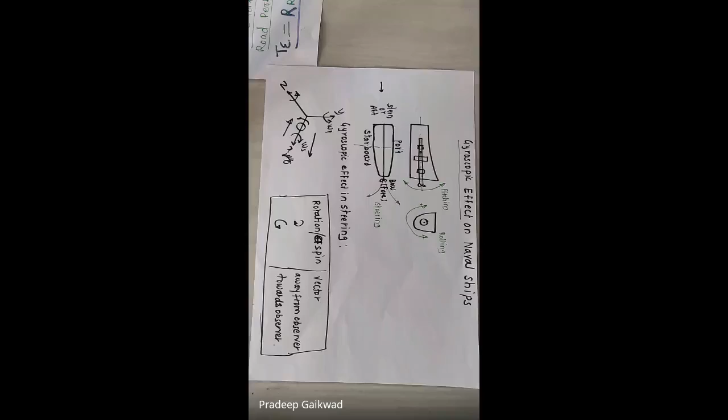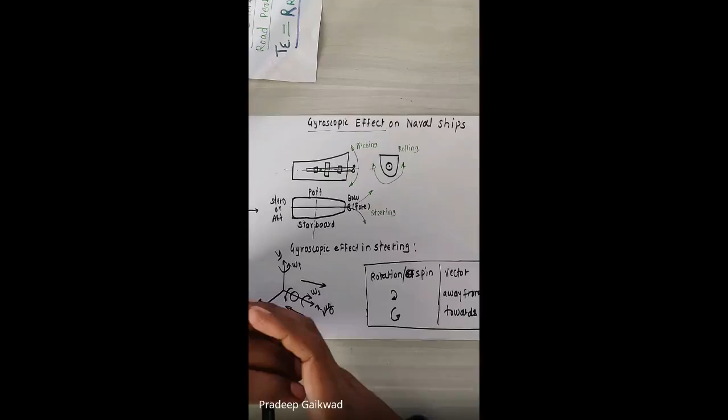I shared with you two videos on YouTube related to the gyroscopic effect in case of naval ships. I hope you understood that. Can anyone summarize that in 2 minutes what we've seen in the two lectures? I'm not going to repeat that topic, I'll just revise it briefly and then go to the next topic, which is four-wheel vehicles.

Am I audible? Hello. Yes, sir. So please, can anyone repeat or review it? Can anyone? Otherwise I will go for the next topic.

Actually, it was an important topic. I don't know how many of you have seen that, I will check it later. But it is expected that you should watch those videos, go through them so that you'll understand the concept of gyroscopic effect in ships. Okay, I will just highlight it since no one is ready.

Excuse me, sir. When we talk about gyroscopic... yes sir, could you please, Vedant, explain the pitching point again? Because at the end it got a bit mixed up.

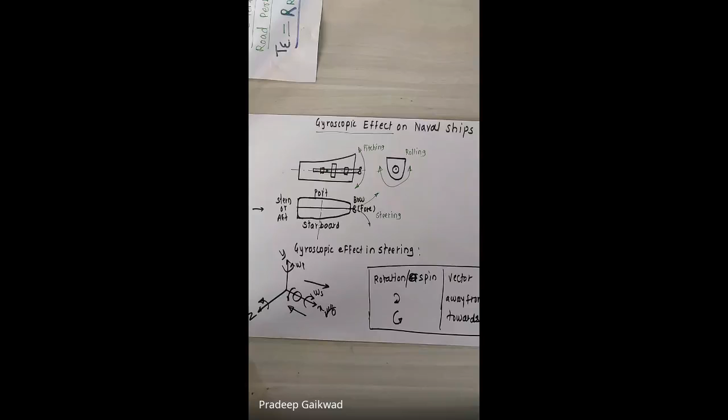Okay, pitching, second case. Yes, can you repeat please what you said? Will you please explain the cases in pitching? Okay, okay, pitching, yes sir, we'll discuss. Sorry, is it possible you can revise the pitching point again because it got confusing in the end? Okay, sure.

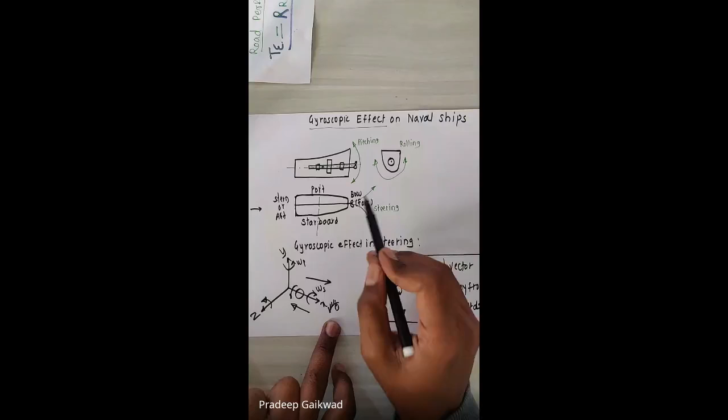I'm going to revise this briefly, so try to concentrate. The rear end is called the stern or aft end. If you observe from the rear end, the right hand side is called starboard and the left hand side is called port.

Now, when we take a right turn or left turn, the motion of the ship - let's say the ship is moving on this straight path and after some time it takes a turn towards the right, meaning it rotates in a clockwise direction, or it takes a left turn. Similar to the aeroplane we discussed, an aeroplane taking a right turn or a left turn - that kind of motion is called steering motion.

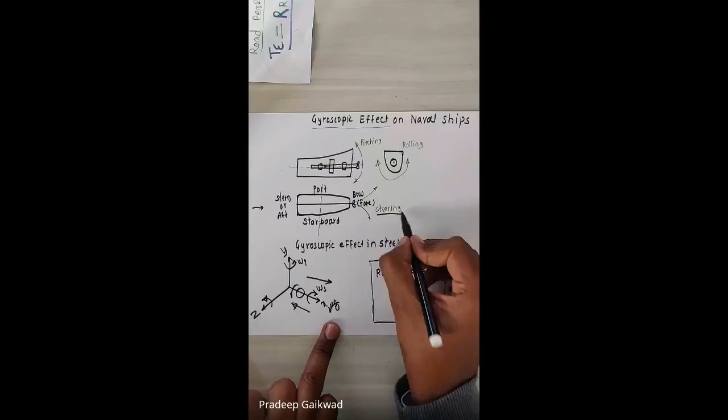When we discuss this ship in the vertical plane, this one is the longitudinal axis. If this longitudinal axis is allowed to move up and down, or whenever there is cyclic up and down motion of this longitudinal axis, we call it pitching.

So what happens during pitching? Let's say this longitudinal axis is at this position. It may move like this - you can see here, in this case, this front end called the bow end moves up. Of course, when the front end moves up, this rear end will move down. The reverse may happen too. So there is cyclic up and down motion in this way - this kind of motion is called pitching.

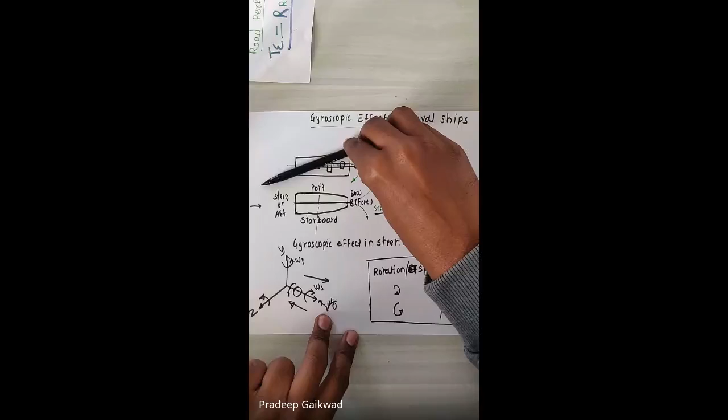Are you getting the difference between steering and pitching? Yes sir. Okay, you can see this - let's assume this is a ship. When I say the ship is taking a right turn or left turn in the horizontal plane, remember this plane is horizontal. In the horizontal plane, either right turn or left turn - this motion is called steering.

But if the ship is moving like this during motion, if this kind of motion occurs - now you can see here, this is the front end, this one is the rear end. When this front end moves up or moves down like this, this cyclic up and down motion about a transverse axis - this is the transverse axis - is called pitching.

And there is one more motion. If you see this, let's assume this is the ship and I am observing from the rear end - so the right hand side is called starboard and the left hand side is called port.

Okay, so either from starboard or port, this one is rear end, this one is front end. What I want to explain is rolling. If the ship is moving like this, starboard moves up, starboard moves down, port moves up like this. So cyclic up and down motion of starboard or port side is called rolling. Rolling is about which axis? This one is longitudinal axis, this one is transverse axis. So about longitudinal axis, this motion is there - cyclic up and down motion about a longitudinal axis is called rolling.

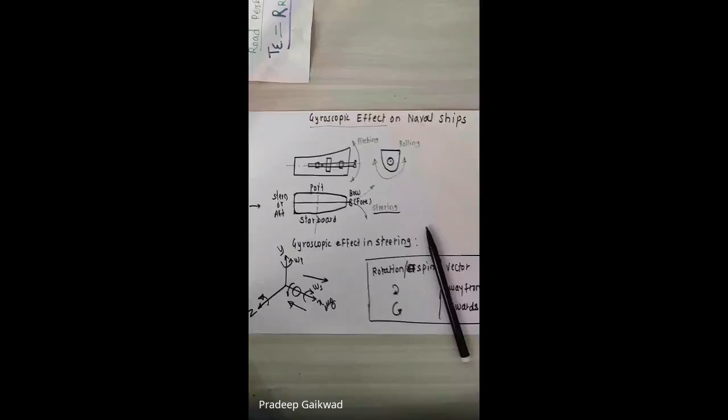So three motions are there in case of ships that we have to discuss. In case of aeroplane, we just discuss when it takes left or right turn, but same motions are applicable for aeroplane also. Generally in syllabus we discuss only that as per syllabus, but in ship we have to discuss all.

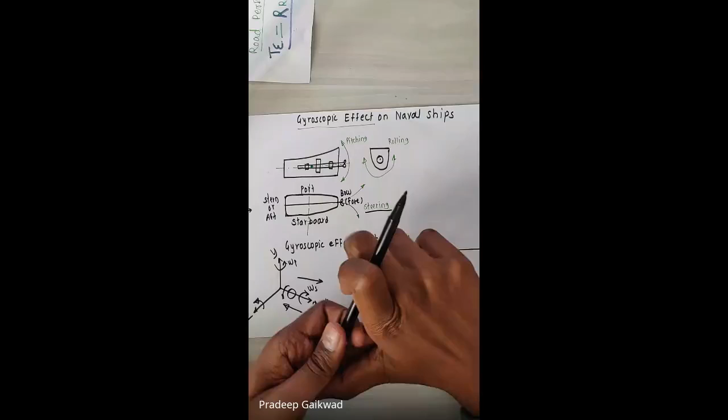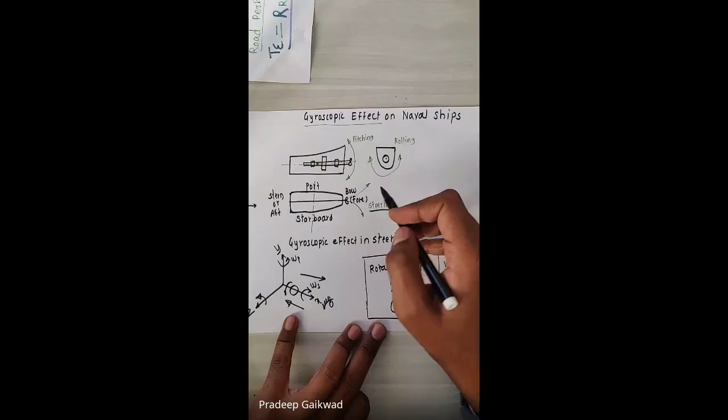Now see here, in case of steering, it is similar to a gyroscopic effect discussed in case of aeroplanes. Whatever numericals, whatever 8 cases we discuss, all 8 are applicable here. The front case - observe from rear end or observe from front end. For rear end, there are 4 cases; for front end, there are 4 cases. Observe from rear end, rotates clockwise and taking right turn, left turn - 2 cases. Observe from rear end, rotates anti-clockwise, taking right turn, left turn - other 2 cases, total 4. Then for front end, observe from front end, rotates clockwise, right turn, left turn - 2 cases. Observe from front end, rotates anti-clockwise and taking right or left turn - again 2 cases. Like that 8 cases are there.

So that they are similar to this steering. And what we observe in case of steering, in case of aeroplane, we seen whenever this aeroplane is moving with some velocity and taking right turn or left turn, its effect is what? You tell me the effect please. Steering - I will explain pitching with this example. So tell me, what happens when aeroplane is taking right turn or left turn? Any case, what is the basic effect? What happened due to gyroscopic effect on this aeroplane?

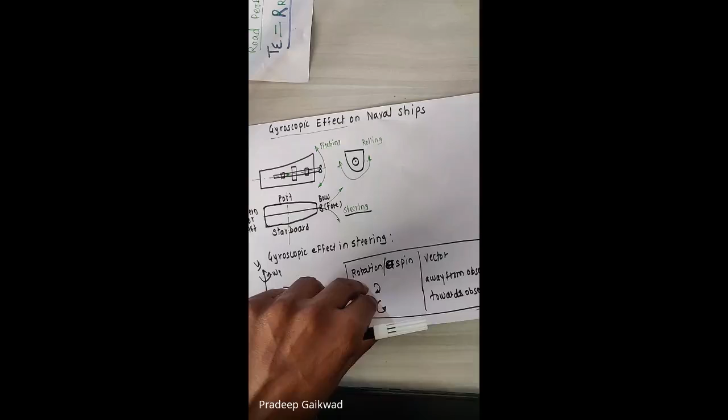When precession in horizontal plane, that is steering, the gyroscopic couple acts in a vertical plane. We discussed this earlier, including cases for aeroplane in the morning session. Now we can discuss it for ship, similar to what I already discussed in that video.

Assume this ship is moving toward this side, and we observe from the rear end. Observed from the rear end, the rotor rotates clockwise. So where is our vector here? You can see vector OA. Observed from rear end, rotor rotates clockwise.

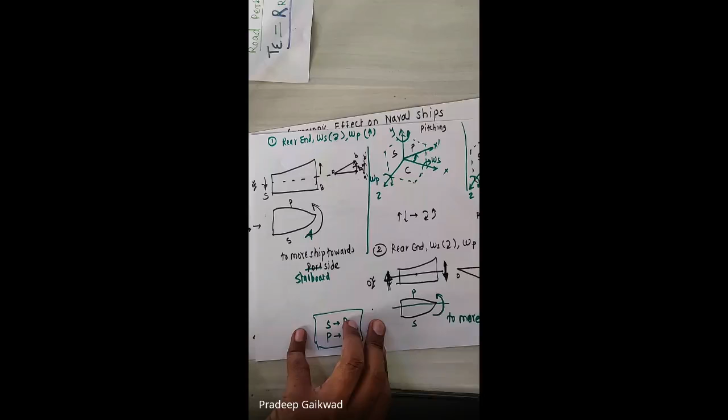Away from observer. Of course, it must be away from observer. Why? Because the rotor rotates clockwise and is observed from the rear end, so the spin vector is away from the observer. So it is OA. Is it visible? Yes, sir, okay. So vector OA is here.

Now for precession, what is given? Omega P. Here, actually, this is the pitching case. One minute, we will discuss steering.

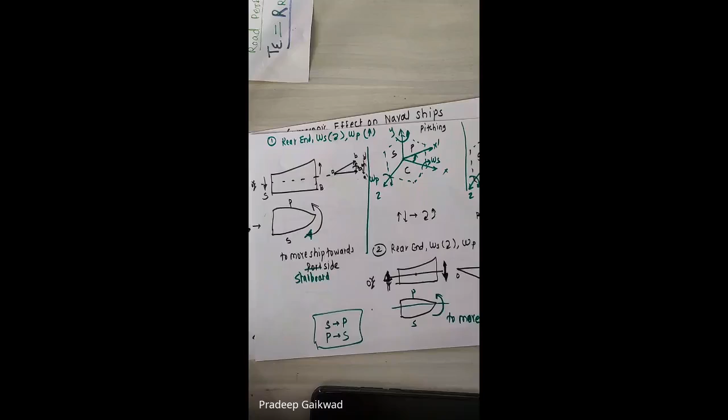Let's discuss here. This one is steering. Observed from rear end, taking a left or right turn. So it is taking a right turn here. So OA is the spin vector, OB is the precession vector, and now AB represents the active couple vector, B dash A dash represents the reactive couple vector. I already discussed this in case of aeroplane.

Just replace aeroplane by ship. So what happened here? The reactive couple vector is away from observer, which means now it is clockwise. So you can see in this case, the effect of the gyroscopic couple is clockwise, as I found out here.

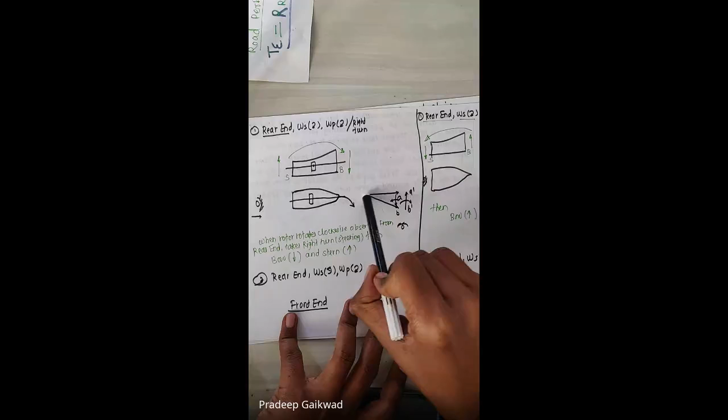So first step: locate the observer, draw a ship in top view and front view, locate the observer, and draw vector OA. I am telling you the procedure. Draw vector OA from the spin vector, depending on direction of rotation. If clockwise, it is away from observer; if anti-clockwise, towards observer. Then get OB, the precession vector,

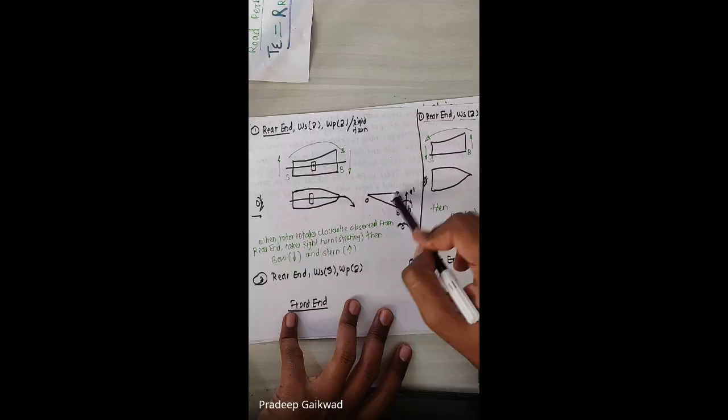based on right or left turn, or you can say clockwise or anti-clockwise direction of precession, and then join AB to get the active couple vector. Draw B dash A dash opposite to AB. If AB is towards this side, B dash A dash will be opposite. And now locate your observer for the gyroscopic couple.

This is important. In the morning session it was on desktop, so I couldn't show you, but here I have shown it. This is your observer for spin, and this is your second observer for the gyroscopic couple. So I kept it on the right hand side.

I got the answer. Why on the right hand side? You think about that, we'll discuss it. So it is on the right hand side. You have to keep it on the right hand side, but remember, this is only for steering, not for pitching.

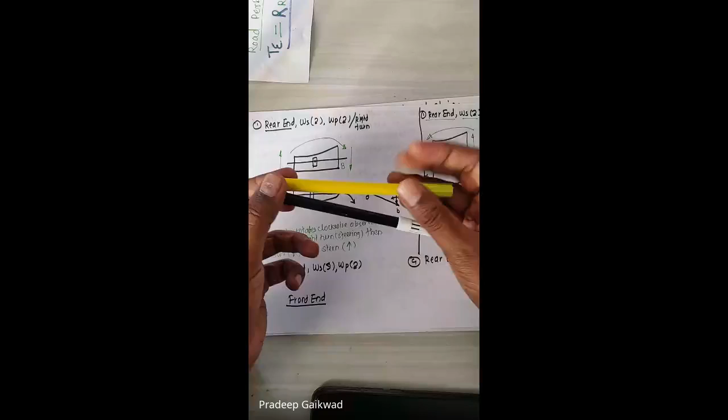So this is OA, let's assume it is OA. It moves to... let me show you this. This is your vector OA shown by yellow color, yellow pen. This is your vector OB, and this represents AB. Let's say AB is toward this side, towards me.

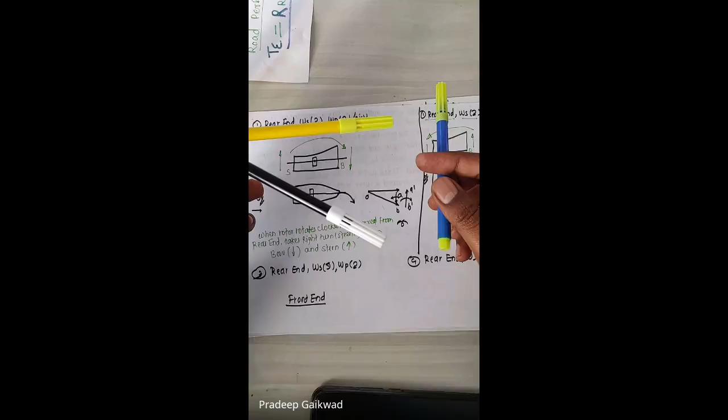So B dash A dash will be opposite, it will be like this. Are you getting it? This vector B dash A dash is moving away from me, so away from me means clockwise. Understand or not? Yes. Okay, so away from me means clockwise.

So this gyroscopic couple acts on this ship. If I take a right turn or left turn, what is the effect? The effect of the gyroscopic couple is that this bow end will move down and this stern end will move up. Are you getting it? Similar effect in case of aeroplane.

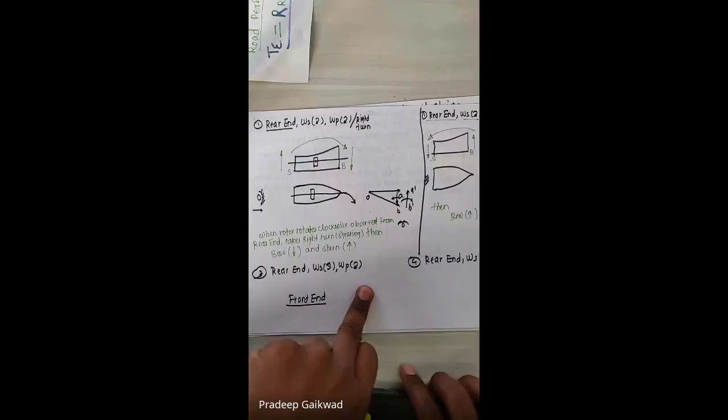So when the ship is steering like this, right turn or left turn, its effect is to move the bow end up or down, meaning the effect is pitching. We consider different cases. Consider a second case here: observed from rear end, it takes a left turn. When it takes a left turn, the effect is reversed. You may notice here.

When it is taking a right turn or left turn, omega s is the same, observed from rear end, both cases are the same. First two cases are same, observed from rear end, omega s is clockwise in both. But only omega p gets changed. If one parameter gets changed, then the effect gets reversed.

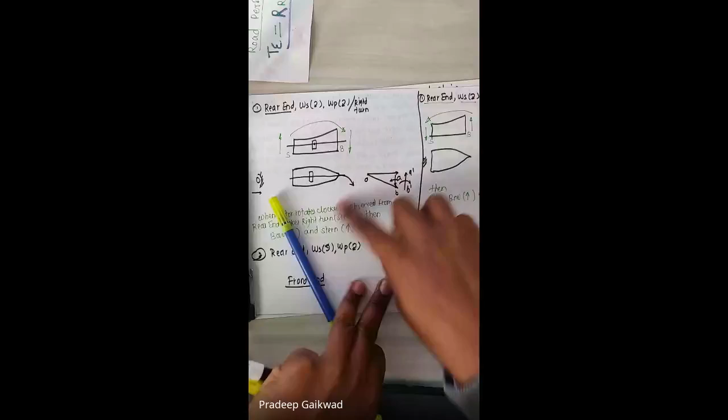Now tell me, if both parameters get changed, like here, observed from rear end only, but omega s is anti-clockwise and omega p is also anti-clockwise, then what happens? What will be the effect here? Anyone find out?

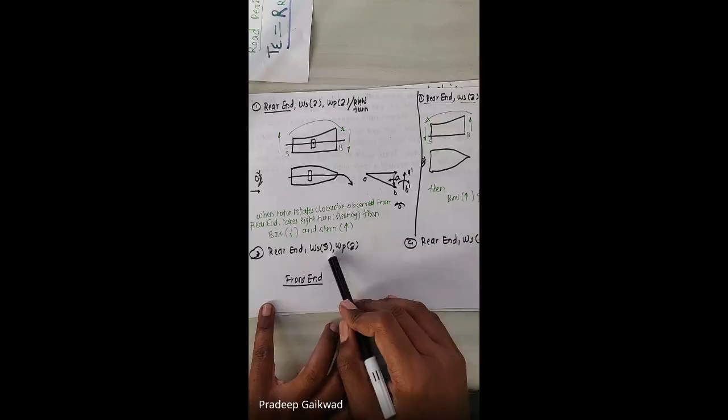Check it here for this case. Rear end, observe from rear end. Okay, I will draw it if you are confused. Omega s is anti-clockwise, observed from rear end. And omega p also, okay, I want, no, here it is wrong. Actually expect here, both are anti-clockwise, I want to change both. Here both are clockwise, I want to take both anti-clockwise. Both anti-clockwise, observe from rear end. What will happen?

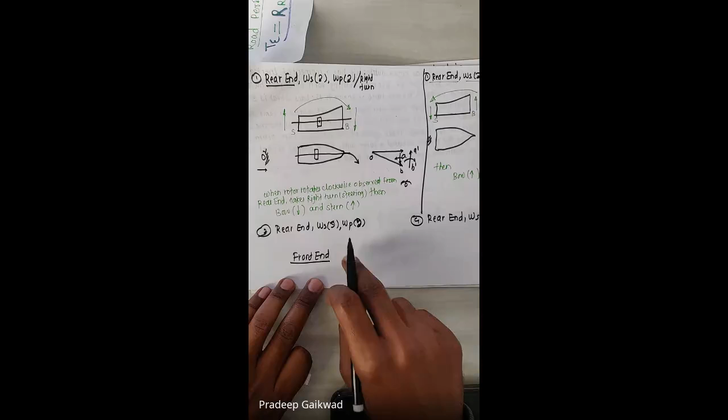Can anyone tell me? If the bow moves up. Okay, you see here, it's very simple. Those are not getting it, so I am now explaining steering one last time. It's applicable for aeroplanes as well as ships.

Okay, now see how it is. I drawn here in top view. I hope it is visible to you. In top view, I drawn this ship. And in this front view, I drawn this ship. Now, where is my observer? Where is observer given? There. See the procedure, how to build this diagram. I'm telling you the procedure: draw top view, front view.

Observe, now we are discussing steering. So steering means, tell me, steering means in which view, top view or front view, can I see precession? Both are longitudinal axis. In which view can I see precession? Means from which side can I see precession? Top view only. Do you understand or not?

Yes, taking right turn, left turn. So I have to observe from top side. So top view is important for me. Therefore I kept my observer here. Let's say your observer is here, you are observing from this side. Why? Because the given case is rear end.

Now it is given omega s is anti-clockwise. This is an interesting case. Omega s is anti-clockwise. Now tell me, where is your OA vector? I will draw here, it is parallel to this axis, spin axis. This is spin axis, I am drawing parallel to spin axis. Now I want to know whether this vector is towards you or away from you.

Towards. Yes, it must be towards, because I told you anti-clockwise means towards, clockwise means away. Okay, so this is your vector OA now. And now see carefully, this is vector OA. Actually, the ship is moving towards the right side. If I see from this side, from top side, the ship is moving from the right side, but the spin vector is opposite to that.

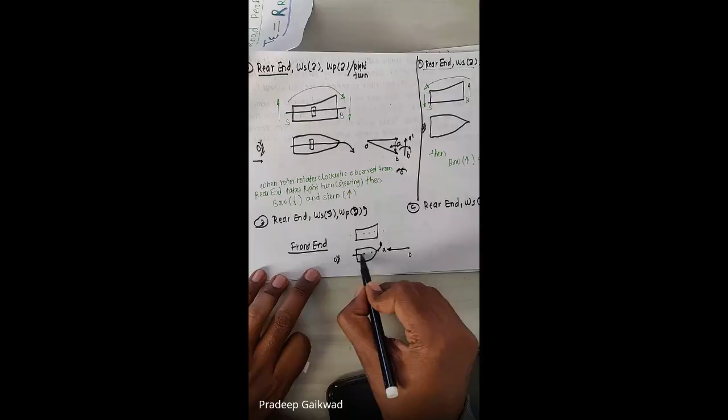Now vector OA is here. Ship is taking left turn, meaning how will it move? Vector OA is acting from O to A. Here too I have drawn it. So where should I draw this? Either towards this side or towards this side? Down. Yes, because now see, assume that you are standing here.

You are standing on this arrow and you have to take a left turn. This is your direction of spin vector. So I have to take left turn, meaning I should move it down. Do you understand? So while drawing the precession vector, you have to think about the vector direction.

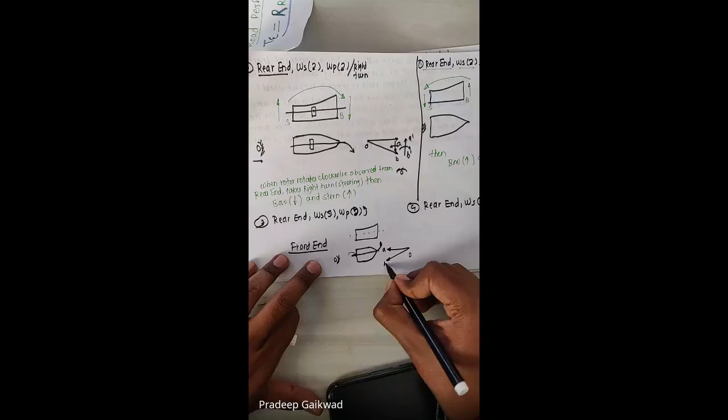OA is here, I have to take left turn. My vector is towards O to A. So since I have to take left turn, I should move like this. So this is your vector, that is left turn OB. Now AB is your active couple vector. B dash A dash is your reactive couple vector.

So if you observe from the right hand side of the spin vector, that is from here, it is moving away from me. Away from me means clockwise. So this is your gyroscopic couple vector. What is the effect of this? Bow will move down and stern will move up.

Some student text in chat box. Okay, bow moves down. Yes, right, it must be. Bow will move down and this will. But try to understand this.

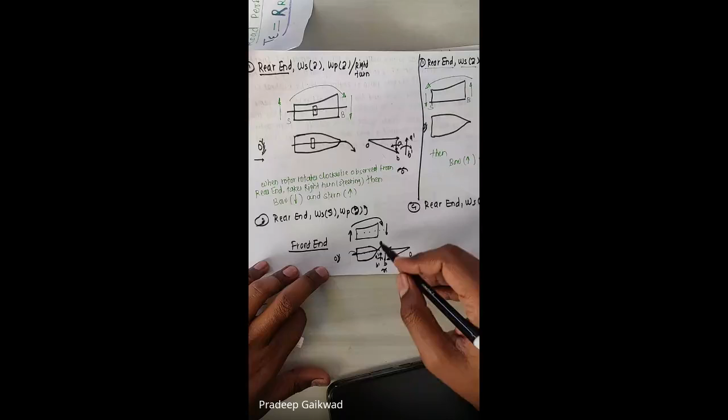Even though ship takes right, sorry, left turn here, OA is not upward. OA must be on the left side. Because OA is from O to A, it has to take left turn, so it is moving down. To get direction, no need to use right hand directly, we can use hints. Keep it on right hand side. See direction of vector, it is moving away means clockwise. Clockwise means like this. Now tell me in this case.

Same case, omega S is anti-clockwise and omega P is... Okay, any one case? Sir, we take both cases. Excuse me, sir. Yes, please.

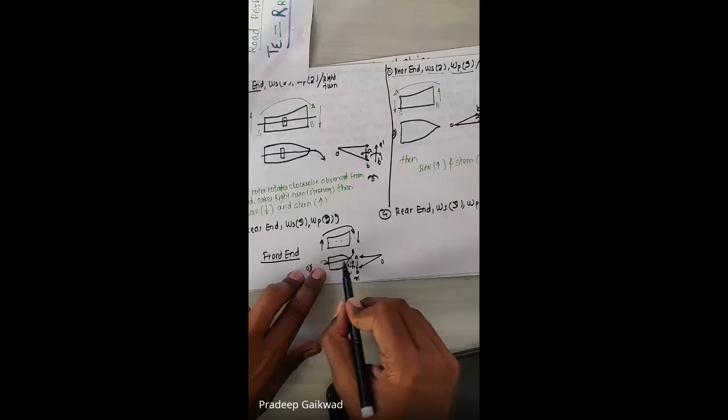I am saying here it is taking left turn. I am observing from the right hand side of that spin. Okay, I said vector, instead of vector you have to correct it as spin. You can say axis of spin.

Okay then it is right. I used the word spin vector. Okay, that will be the same, that will be spin vector when it is moving in the same direction. Means your direction of movement and spin vector in same direction, then it is okay from right hand side of spin vector. Here it is in this case, but in this case I can say on the right hand side of spin axis.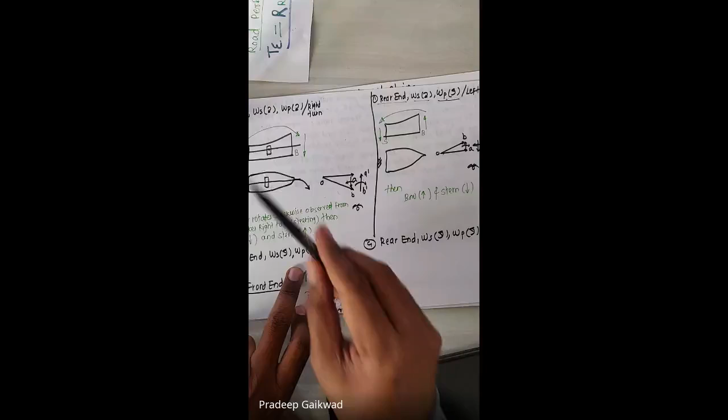Here it is anti-clockwise.

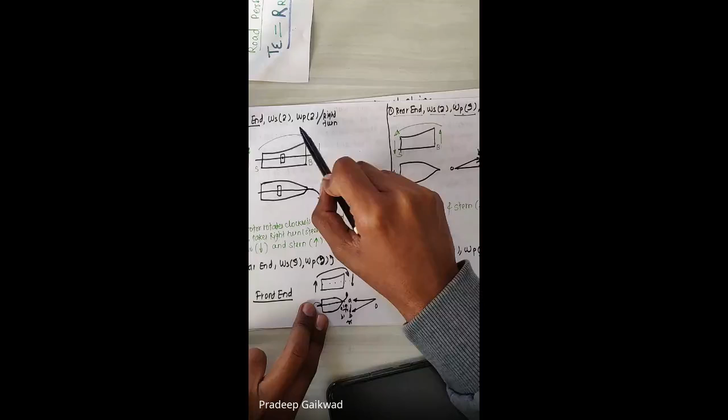Anti-clockwise. Yes, effect will be anti-clockwise. Means what? Notice: if one parameter you change, when both are clockwise, if I change both to anti-clockwise, effect will remain same. Out of this, only one parameter get changed, its effect will be reverse. You can see here, it is clockwise rotation here, one parameter get changed, anti-clockwise. Both get changed, clockwise. Likewise, we can see for steering.

So I think you understand how to find out gyroscopic couple in case of steering as well as in case of aeroplane, because it is same applicable for aeroplane also.

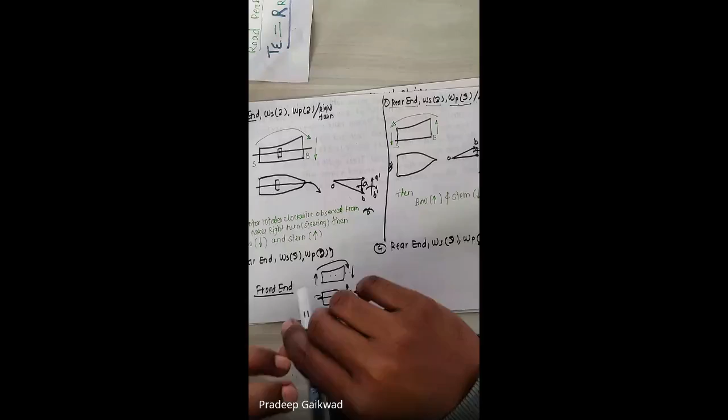You can see these 8 cases already I drawn here. We can use this for aeroplane as well as ship.

Okay, now let's start with pitching.

Okay, just go through this. Can anyone tell me the effect difference between steering and pitching? Yes.

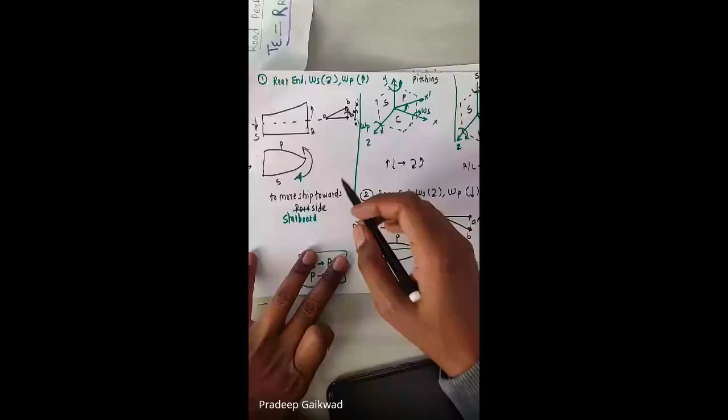See what happened in pitching. Let's say this ship is given to you, and we know basic terms like bow end, stern end, port, and starboard. Now what is given here? Observe from rear end. Omega S is clockwise, and now omega P.

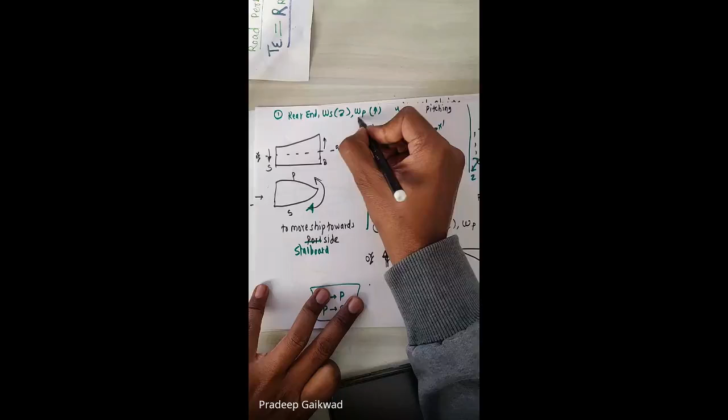Instead of saying right or left, in order to define angular velocity of precession, we have to say either this bow end will move up or down. Pitching means ship will move up or down like this. So what is given to you? It is given ship pitches upward. The case is like this.

Observe from rear end. Rotor rotates clockwise and ship pitches upward. In examination it is given like this: pitches upward means bow end will move up, pitches downward means bow end will move down. It is given to you, so from that you have to write.

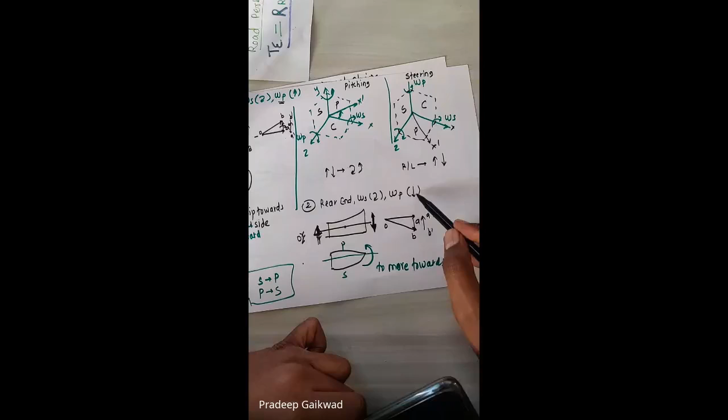Assume upward arrow means it moves up, and in the second case we can see it moves downward. So if pitches downward is given, how to find gyroscopic couple?

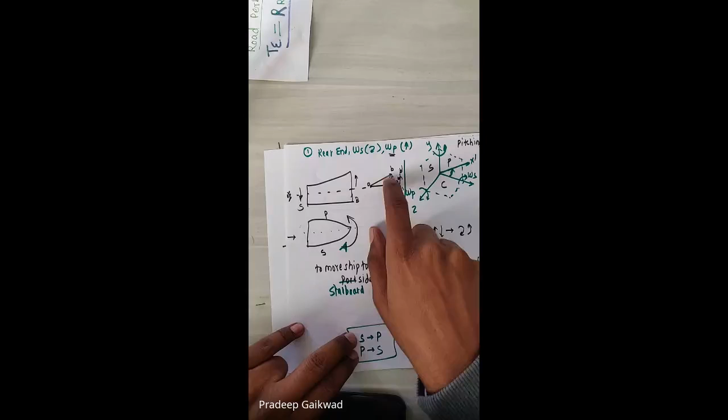Up, so OB is drawn upward because it pitches upward. So if this is your OB, you can see this is your OA. It moves up. Now precession happens like this, understand this.

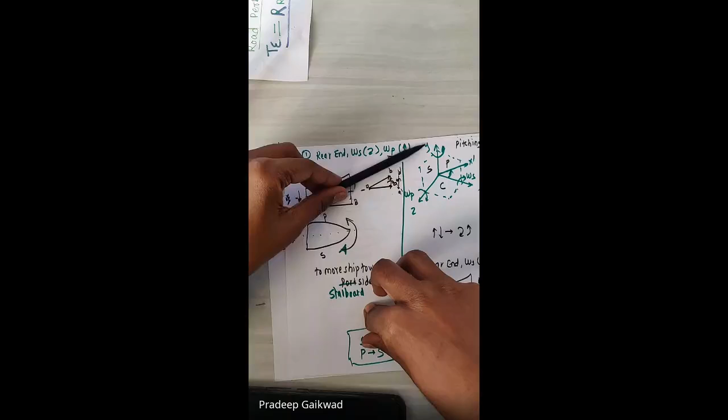Did you understand or not? Therefore upward. And then join AB to get active couple vector, join B dash A dash to get reactive couple vector. Now tell me, to observe this reactive couple, from which side do you have to observe?

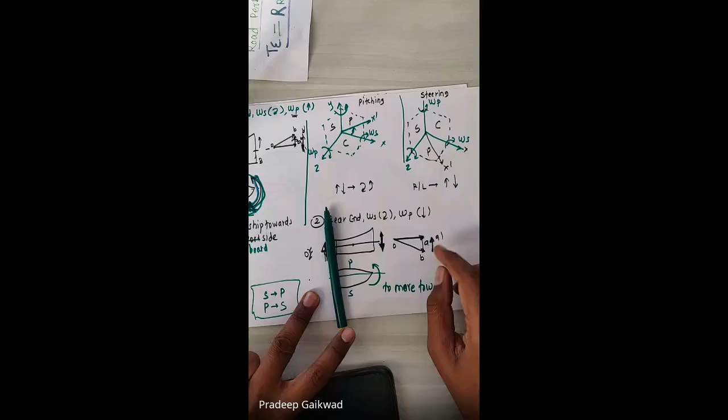Upward means acting anti-clockwise. So here you can see this is your anti-clockwise and this will move this ship towards port side.

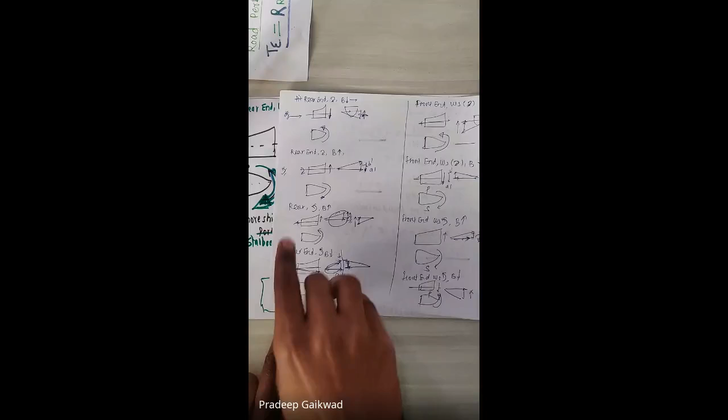मग आता इथं रोटेट्स अँटी क्लॉकवाइज म्हणजे काय होईल, हा वेक्टर ओए कुठे येईल. ऑब्झर्व फ्रॉम दिस एंड, हा वेक्टर ओए इज टुवर्ड दिस साइड, हा अपोजिट होईल, टुवर्ड्स ऑब्झर्वर. क्लॉकवाइज अवे फ्रॉम ऑब्झर्वर, अँटी क्लॉकवाइज टुवर्ड्स ऑब्झर्वर.

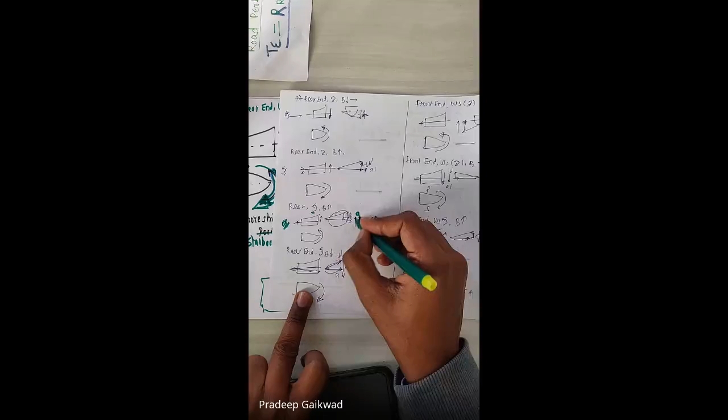आता इथं समजून घ्या, स्पिन वेक्टर जेव्हा उलटा येतो म्हणजे अपोजिट डायरेक्शनला येतो, तेव्हा तुमचा बो जर अपवर्ड म्हणजे पिचिंग अपवर्ड असेल तर हा कुठे ड्रॉ करायला तुम्हाला डाऊनवर्ड करावं लागेल. ए बी इज डाऊनवर्ड आणि बी डॅश ए डॅश इज अपवर्ड, अपवर्ड म्हणजे क्लॉकवाइज.

बो मूव्ह डाऊनवर्ड, ओए तर तुमचा हा वेक्टर झालाय, बो डाऊनवर्ड मूव्ह होतोय म्हणजे हा तुमचा कुठं होणार आहे, वरती होणार आहे. आता हे का असं होतंय, तुम्ही इथं पहा, एक सिंपल गोष्ट समजून घ्या.

हे जर तुमचा शिप आहे, हे असं का होते, जर तुम्हाला उलट वाटत असेल, उलट का करायचं, अपोजिट का करायचं, तर समजून घ्या, फर्स्ट केसमध्ये जेव्हा तुमचा क्लॉकवाइज होता, तेव्हा तुमचा स्पिन वेक्टर जो आहे हा ओए वेक्टर, याची मोशन आणि याची मोशन सेम होते, डिरेक्शन सेम होते स्पिनची. त्यामुळे जर हा वरती गेला तर हा पण वरती जात होता.

इथं काय होतंय, हा उलटा होतोय, स्पिन वेक्टर अपोजिट आहे. मग जर हा स्पिन वेक्टर मी इथं पुट केला, दिस इज माय स्पिन वेक्टर ओए, सिमिलर टू दिस. शिप काय होतंय, शिप इज मुव्हिंग डाऊन. मग हा स्पिन वेक्टर काय होईल, लक्षात घ्या.

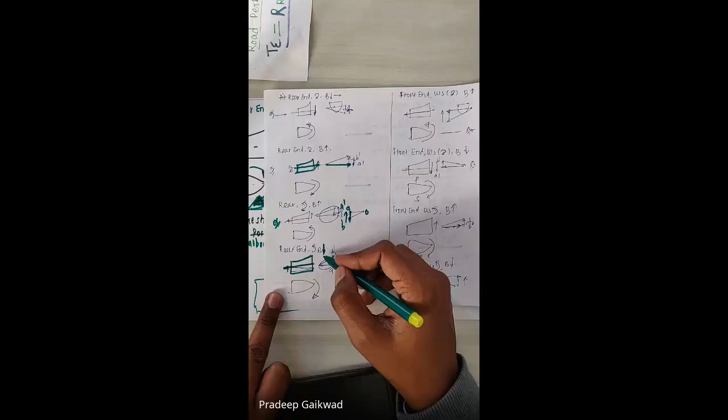आता हा जो तुमचा शिप आहे, समजून घ्या, दिस इज शिप आणि हा तुमचा स्पिन वेक्टर आहे. इट इज अपोजिट ऍक्च्युअली, शिप जेव्हा मूव्ह डाऊन होता, हा स्पिन वेक्टर काय होणार आहे, अप होणार आहे. हा पॉईंट ए, जर हा बो एंड मूव्ह डाऊन झाला तर शिपचा एंड अप होतोय, म्हणजे उलटा होतोय. बो एंड अप, सो ए बी इज डाऊनवर्ड, बो एंड डाऊन सो ए बी विल बी अपवर्ड.

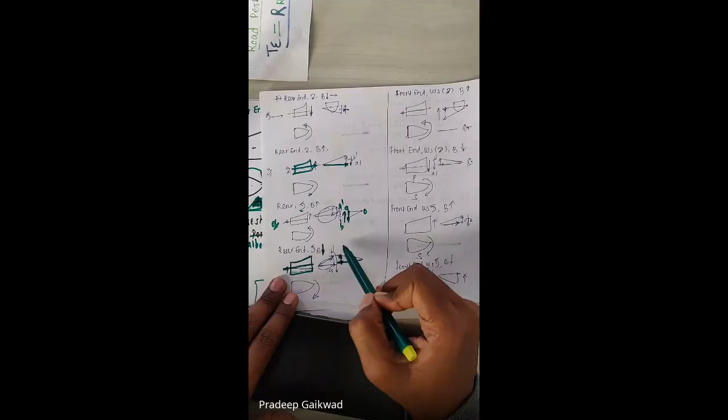Likewise, you can find out. So these are the 8 cases you can see, and these are the front end cases. Observe from front end. You can keep your observer here. Observe from this end. So anti-clockwise means, sorry, clockwise means away from observer. So this is away from observer case, and anti-clockwise means towards observer.

So in this case, these are the same. Towards observer, motion and spin vector is same. But when away from observer, then it is opposite. So these are the 8 cases that we need to find out, that you need to solve. Any doubt, please ask.

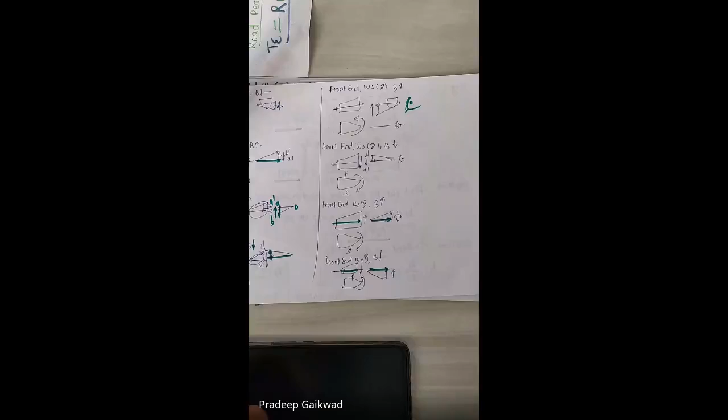म्हणजे सर पिचिंग मध्ये जेव्हा रिअर एंड आणि अँटी क्लॉकवाईज होते तेव्हा डायरेक्शन चेंज होते स्पिन वेक्टरची. Rear end anti-clockwise means spin vector is towards observer. This case. येस सर. हा बोल.

आता WP चाललाय वरती. So the WP, reaction ha, spin vector will go down. Yes, spin vector will go down means OB is downward. Okay, sir. And AB is downward means B dash A dash is upward. And B dash A dash is upward means it is your like this couple. So it will be clockwise. Gyroscopic couple is clockwise.

And its effect is to move towards port side. Getting or not? Hello? You got your point?

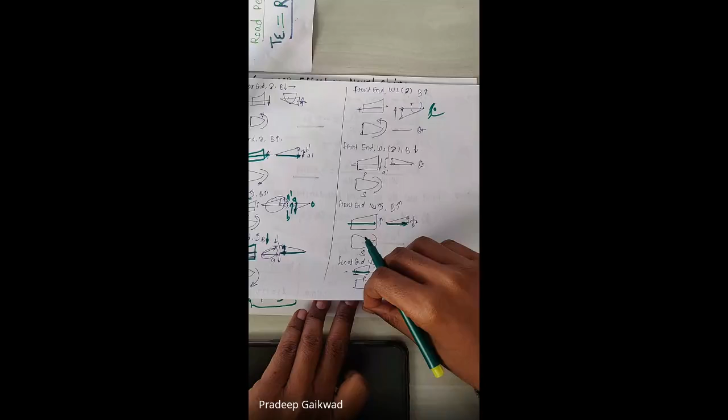Okay, any doubt? You have to practice these 8 cases for aeroplane and for ship. Sir, if the boat itself experiences a spin, will it be stabilized by gyroscope? Yeah, that's what.

Good. Piyush. Hello. Hello, Piyush. Your question is if the boat itself experiences spin, will it be stabilized by gyroscope?

See, that is what that is concept of gyroscopic stabilization. You're right. Means I think your question is like this: if this is boat, and let's say due to the waves, heavy waves, it moves like this or like this. Are you getting? Means there is disturbing couple acts. Then how to stabilize it by using gyroscope?

Is it your question? Means some disturbing couple is acting while this ship is in motion. Let's say this ship is moving in a sea and some disturbing couple act like this or in this way. Means we try to move this starboard up, starboard down, disturbing couple in any way, any direction. So how to stabilize it by using gyroscope? Is it your question?

Okay, and that is what is called gyroscopic stabilization. There is a concept called gyroscopic stabilization. If an external disturbing couple is acting, how do we stabilize it? For this we need to apply a gyroscope - we have to rotate a spinning rotor using a motor. We have to apply an additional gyroscope, spin it about its axis, and precess it in one plane. Now, to counter that disturbing couple, in which plane we have to precess it depends on us.

So to get the counter couple, suppose you are moving in a ship and some disturbing couple acts like this. If I am observing from the rear end, this is the starboard side, this is the port side, so your boat is inclined this way. So what is your requirement now? You have to apply some effort in the opposite direction.

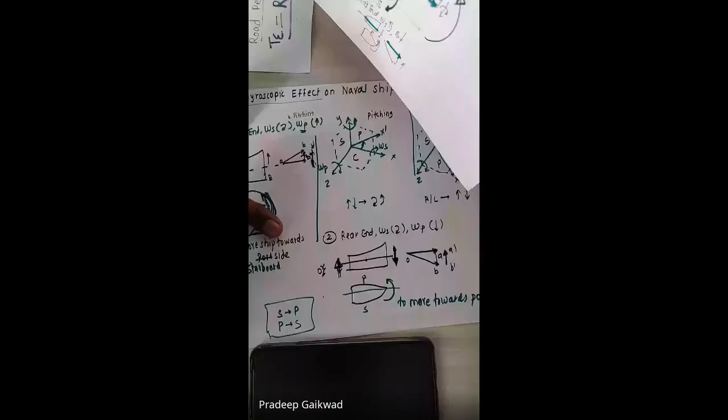In short, we need to solve this problem in the reverse way. That is the answer to that question.

And will it be stabilized? Yes, it is stabilized, we can stabilize it. But one more thing - we can't make this effect or give the solution 100%. If your boat is tilted like this, you won't get a perfectly equal and opposite couple, but we can reduce that tendency. We can nullify it to some extent, but not 100% nullify. We can maybe achieve 80-90%, but not 100%. But the answer to your question is yes, we can.

You got your point, Piyush?

Okay, now see, last point I have to discuss.

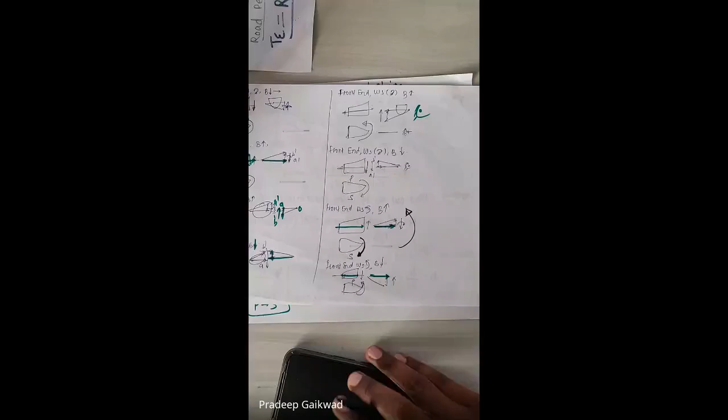Numericals will actually take time, so I'll leave them for you, because numericals are nothing but solving problems - check any reference book, the numericals are solved there with the same solutions. So I suggest, if you have a written book, refer to those numericals. If you don't have books, I will share the solution with you.